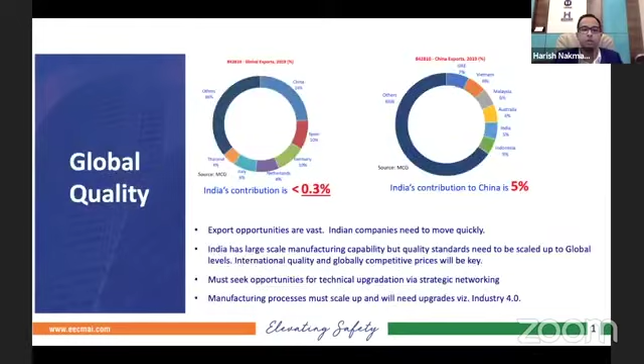The opportunities that we have: the global E&E exports are approximately 20 billion US dollars, and India's contribution is barely 0.25%. Being the second biggest market, there is a huge potential for us to get as much into the global export. And with this idea, how can this be done?

The main factor being that we support opportunities of domestic manufacturers. We make India Atmanirbhar, meaning self-reliant, self-dependent. The local manufacturers can leverage the scale from increased market size to compete with cheaper imports. With this vision, to make India the preferred hub for the global elevator and escalator industry, EECMAI was formed on 10 September 2020.

This is a Section 8 company, meaning a non-profit organization. The mission here is to support the growth of the elevator and escalator industry by promoting continuous improvement of safety and quality standards, education of the community, and networking with domestic and international organizations. There is a variety of tasks which has been put in front of EECMAI. How are we going to do this?

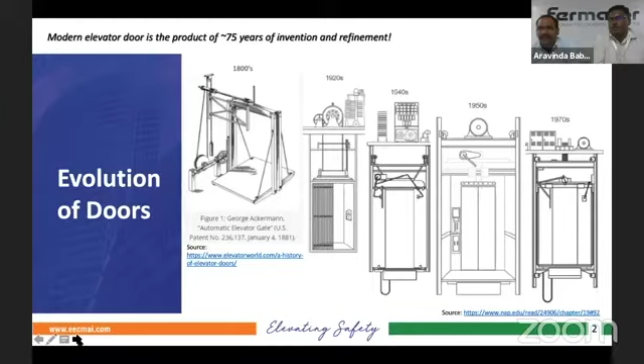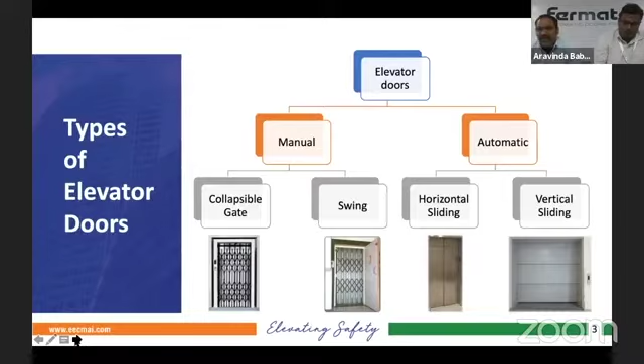Now we will look at the different types of elevator doors which we are using now. There are two variants: manual and automatic doors. In manual, there are two types - one is the collapsible gate, and one with a collapsible gate for the cabin and a swing door for the landing. Similarly in automatic doors there are two variants - horizontal biparting and vertical biparting. Now I will explain a little more about manual doors.

So let's go further - manual doors. I hope every participant has seen this type of door even now or in their younger age. These doors are basically very cheap, low cost and less technology oriented. To install them, not much knowledge is required, and there is no complicated mechanism or complicated electrical circuit provided - that is the plus point of this door. Compared to the plus point, we have a lot of negative points, which are the problems that occur in this type of door.

Let me explain something from my own experience in past years. When I was in college, we had a similar elevator that we used to board very often. As it was a college, many young people would be traveling in the elevator, and most of the time it would be overcrowded.

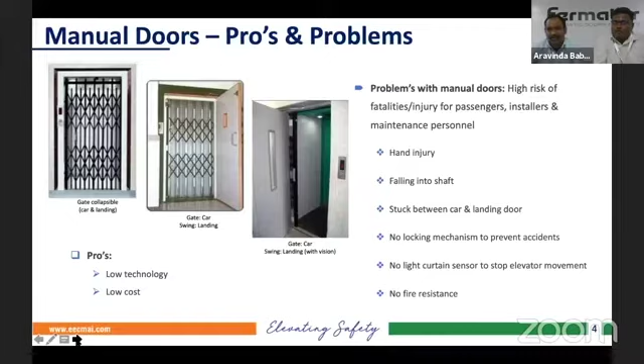As we've seen in the previous slide, similar doors were used in the 1920s. But these doors are still being used now, which is a bitter truth. Can we go to the next slide, please?

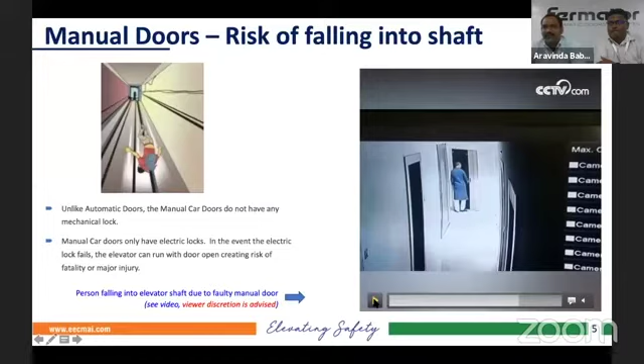This is one of the fatal accidents involving manual doors. In manual doors, it is not supposed to be opened when the cabin is not there, but in this case it was opened. The reason is the landing lock was likely manipulated, or some short circuit was done in the door. When the person tried to open it, he thought the cabin was there inside the shaft, and he was trying to step in, and now he is no more. This is a very evident video showing the risk and unsafety of these manual doors.

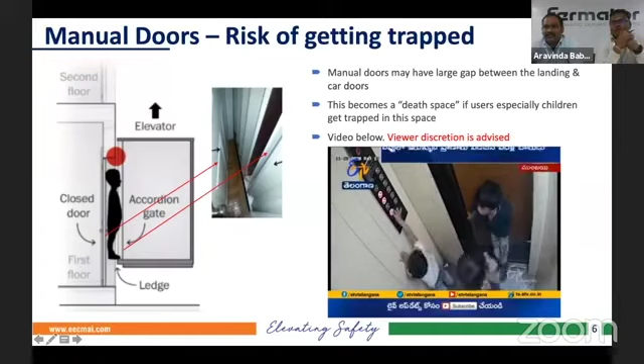This incident occurred last year in November, in Mumbai, in Dharavi. In this case, a boy and his sisters were using the elevator. Once they reached the floor level, the two sisters left the elevator. As these doors have a self-closing mechanism, it closed by itself before the boy could exit from the lift door. In these types of doors, manual swing door with manual collapsible gate, there is a huge gap between the landing and cabin, which is a very bad design of this elevator.

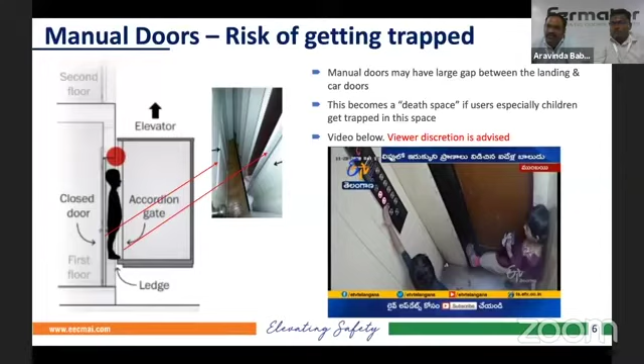In this case, you can clearly see the boy got trapped in between the car and landing. As both doors were closed, the controller registered that the doors were completely closed. Someone booked a call from another floor, and the lift started moving. Now there was no way for him to go outside to the lobby or even get into the car. The lift started moving upward, and the boy got crushed in between the floors, in between the doors. This is one of the most disturbing videos.

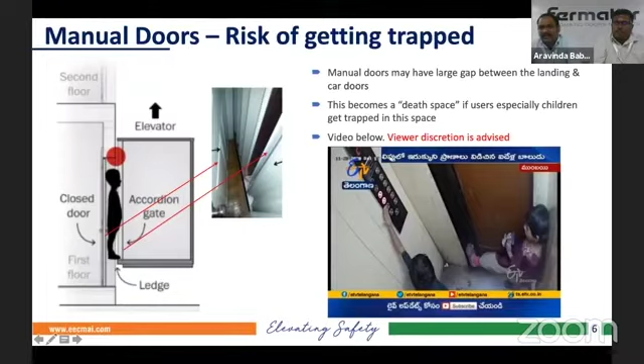Now we will see how hands and feet get injured in manual doors. Let me tell you how we use these manual doors. While entering a manual door lift, first we open the landing door, then we open the cabin door. So after entering, we want to close the landing door first and then the cabin door. Most of the time, people are not so conscious about which door they need to close.

If someone closes the cabin door first and tries to close the landing door by letting their arm reach through the gaps, once the door gets closed, the lift starts moving, and the hands will be totally severed from the body. This is how a major accident happens. As I explained before from my own experience, when more people are in the lift, the chances of handling the door safely are riskier.

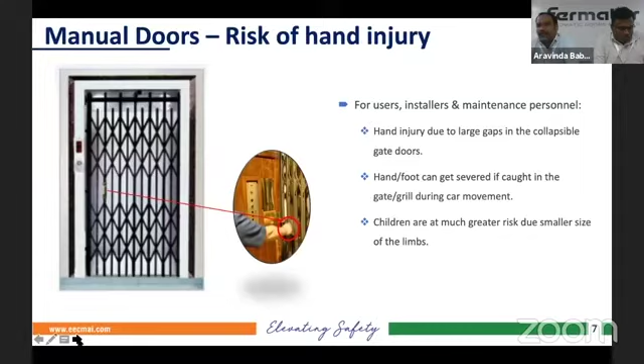So now my colleague Aravinda Babu will explain about automatic doors.

Good evening everyone, this is Aravinda here. I will explain three areas: the classification of the doors, the safety factors of the users, the safety factors of the technicians, and the standards which we apply on these doors. These are the three parts I am going to explain to you.

This is general information about the doors. The first criteria is that doors are classified based on the installation type. The first one is the residential type, mainly used for passenger movement from one floor to another, for less and medium traffic. The second category is commercial, also mainly for passengers, where there is high traffic and more floors, so we go for commercial elevators.

The next one is freight elevators. In this case, we have heavy movement of vehicles, and the application of these freight elevators is for factories and storage facilities. Those areas will be using freight elevators. And special doors are for special requirements, like aesthetic doors, such as half round doors. It's a special requirement from customers, for example in Bangalore.

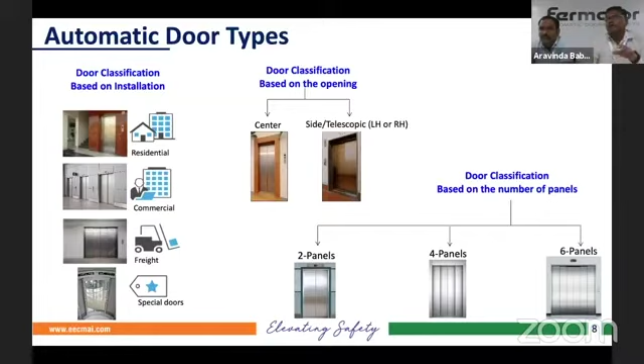In telescopic, we can go for designs of 1 panel, 2 panel, and 3 panels. As basic information, in case of 4 panels, center opening is just a combination of telescopic left and right. This is just a general concept of how the panels are classified based on the openings.

Shall we go to the next slide, sir? Yes, so there are different types.

This is the different types of panels in the market. The first image refers to the 4 panels, a standard panel made of sheet metal. The second image refers to vertical telescopic doors. The third image is for painted panels, the center opening. The last image shows the small visions. At the bottom we can see the half glass, framed glass, full glass, and panoramic glasses.

These are the panel types based on the visions, and the painted stainless steel. By this category, we can have this variance.

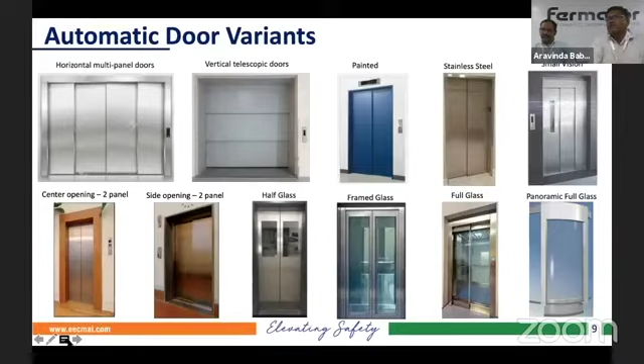Can you go to the next slide, sir? Yes, sir. Now we'll just see general safety features about the users — what general safety factors a user should consider when using these elevators. That's what we'll look at in the next slides.

As the first criteria, whenever a passenger or user is going to use these elevators, when they make a call booking, we need to be patient — either during the call booking or during the travel. That is the first important criteria we need to apply.

Second, when there are children, we should not keep them alone while using these elevators. Always somebody should be beside them. As seen in previous videos, as a safety factor, when there are kids, always a person should be required beside them.

As a third general factor, always stay away from the doors. There is a safety factor here. I can give two examples. We can have loose clothes, and as the car moves, the loose cloth can get stuck in the panels, which can lead to a fatal accident. That is the reason we always suggest staying clear from the lift doors.

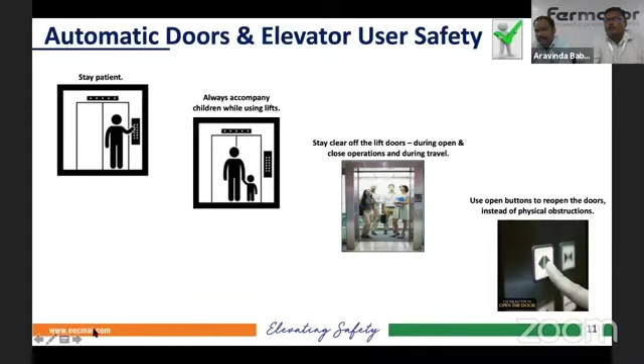So can we go to the next slide, sir? Yes, sir.

These are the don'ts which users should not do. The first image refers to people who would always try to open the door. Some people will try to open the doors when they're in the landing zones or during travel. This is also not safe, so this they should not do.

The second image refers to someone getting into the car and waiting for someone else — to call that person, they stand behind the landing door and car door, stopping the elevator while they wait. This should also be avoided.

As the third criteria, when there is a power failure during travel in the car, there's no need to get panicked. Stay calm, and press the emergency key button, or nowadays there is an ARD option which will take the car to the nearest floor and open it.

The fourth criteria: when you get into the car and nobody else is there, don't jump or play — even for kids, don't allow this. As the fifth point, somebody can come with tension, so don't show anger to the doors, like kicking the panels. This applies during travel as well — we need to consider this point and should not do this inside.

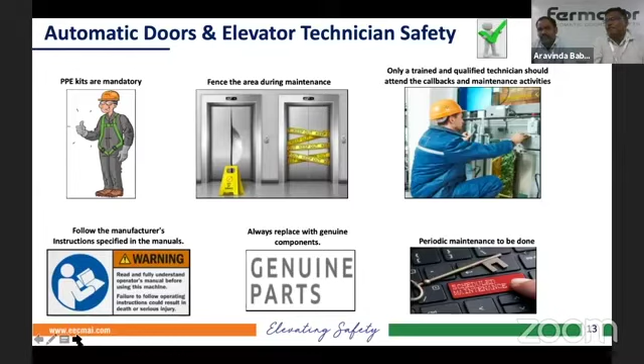Can we go to the next slide, sir? Yes. So these are the don'ts which the technician should not do. They should always not violate the safety procedures, and second, they should not violate any of the safety features.

For example, in this image, you can see one side of this landing contact is not wired, while the other side of the contact has been wired. So it is being bypassed. This kind of bypassing—this is an example like this—we need to follow all these safety factors, and there should not be any bypass done.

They should also always use the communication medium for emergencies. And when accessing the pits, they should use ladders. They should not jump inside, and they should not climb using other components—they should always use the ladders.

Our last two points are mechanical and electrical—they should pay more attention to these. While doing repair works or checkpoints, they need clear checkpoints and need to check all the specified points, as well as check that the wirings are properly connected, because this can also lead to fatal accidents.

Next slide, sir. Now let's see the standards we apply here. As a first point, there are a lot of automatic doors in the market, but not all automatic doors are tested or certified. The doors which are tested and certified within CEN, BIS, GB, ASME will be the correct doors.

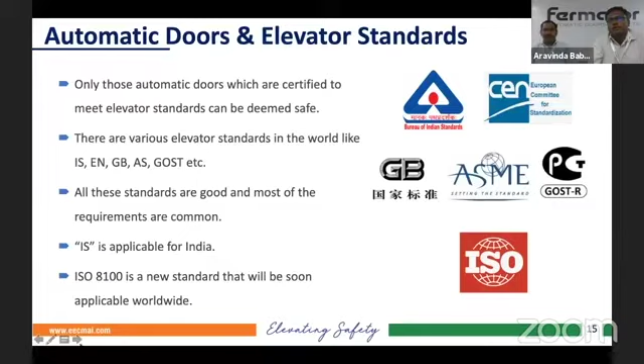This is the standard used worldwide—this is for Europe, Russia, Asia, and North America. These are the general standards used all over the world, and for us in India, we follow IS 14665. That is applicable for us.

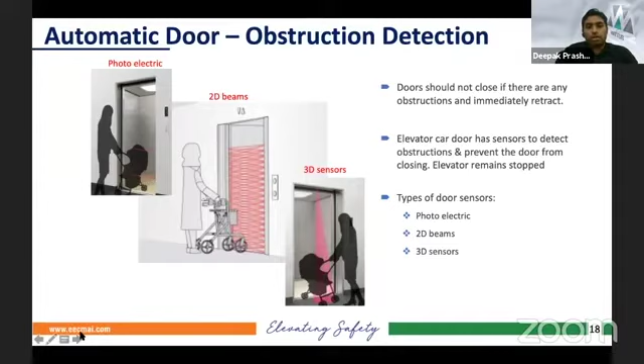The next important aspect of an automatic door is that it's also tested for impact resistance. Automatic doors are tested based on prevailing elevator standards - as my colleagues have previously explained, for different regions there are different elevator standards, and each prescribes what the impact resistance should be. It also has to be ensured that even after impact, the door should not come out of the elevator sill, and it has to act as a barrier to avoid the person falling into the elevator shaft. I have a small video which took place in past years.

You can play the video.

Mr. You can pause the video.

So here you can see, though this incident could have been avoided, this is the reason why even if a user tries to vandalize or show his frustration due to unknown reasons, all elevator automatic doors, landing doors and car doors both have been tested for impact resistance.

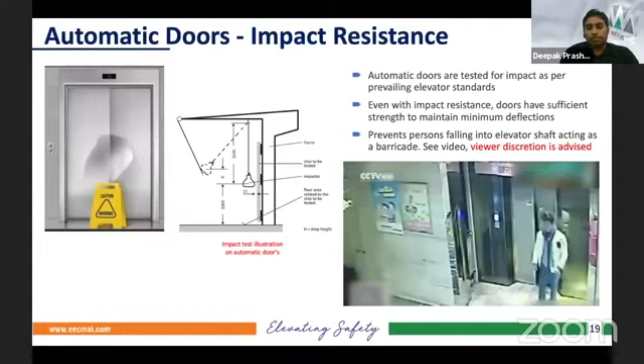The next one is the moving elements, the door panels, which are guided at the bottommost section by a subcomponent called the sill. The last one is related to the toe guard. This is the basic layout of the automatic elevator landing door. Each subcomponent is tested for mechanical tests, electrical tests, durability tests, and also fire tests. So whenever a door system is designed, this checklist has to be ensured, tested, certified, and only then is it released to the market.

The detailed testing of the subcomponents I'll explain in the next slide. Apart from the automatic elevator doors, it is also considered a silent operation, and this is ensured by performing a noise test in an anechoic chamber.

The basic difference between manual and automatic doors is that in manual doors you have to touch the doors to open them, whereas in automatic doors it is all controlled by the system so the user doesn't have to touch it. That is why it is considered touchless entry.

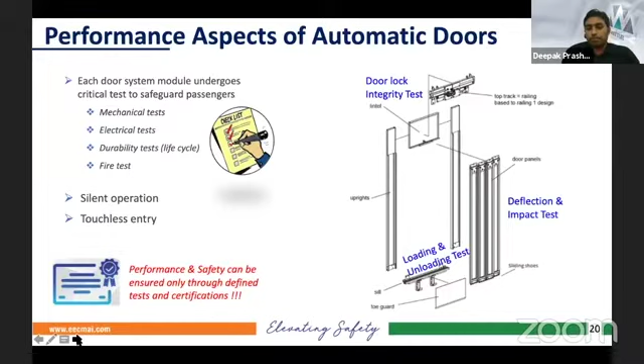Next slide, please. This is related to the landing door mechanism, and here we are checking the lock integrity. The landing door lock prevents the door from being opened manually, and this door lock is a very critical component, as it assures safety in automatic doors.

This is ensured in automatic doors by getting a CE certification. A CE certification is from a third party or certified external laboratory which ensures or witnesses the test performed by the manufacturer after providing the design details and test reports.

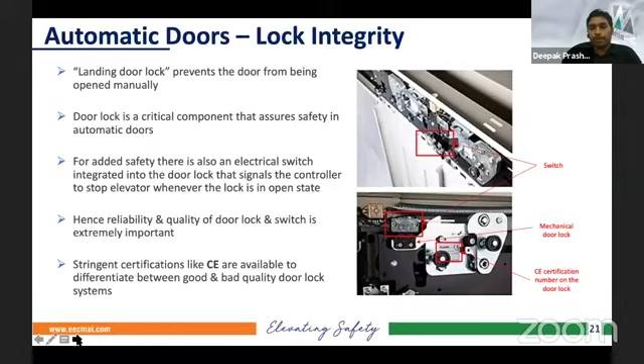Next slide, please. This explains the second criteria of a door panel system: deflection resistance. The first criteria here is ensuring the gap between two door panels.

Consider a condition during maintenance where untrained technicians, or for an unforeseen reason an end user, get trapped inside an elevator shaft, and when trying to exit they try to pull the doors manually to get untrapped. This is actually a risk to both the technicians and the users, since there is a landing door lock provided in the automatic elevator door system.

By pulling with hands, the gap between the door panels can widen, and people can get stuck in this gap. Even when people get stuck in this gap, the door panels are still intact at the top, because the landing door lock prevents the doors from opening, and this makes the elevator system consider that the doors are closed and the car can operate.

But for this reason, there is a special kind of test according to EN, IS, or even American standards for different criteria, where a predefined load is applied at the bottommost panel and the midsection of the panels. This simulates that environment, and it has to fulfill the deflection criteria.

This is again a deflection criteria resistance, but to different subcomponents. Right now we'll focus on the elevator door sill, shown in the first image with the blue arrow marking. This is called an elevator sill, which has a primary function to withstand the deflection caused by people and material movement for the period of 20 to 25 years for which the door system is designed.

A weak sill, if it deforms, can form a trip hazard. When people enter or exit the elevator, they can fall in either direction, causing serious injury to end users. Hence, elevator door sills must be thoroughly tested to ensure the deflection is within the prescribed standards.

In this testing, there are different guidelines or criteria to be followed. One is a static load test, and another is a dynamic load test. In the static load test, the worst case load is applied on the sill for a predetermined timeline, and after that, the deflection of the sill is measured.

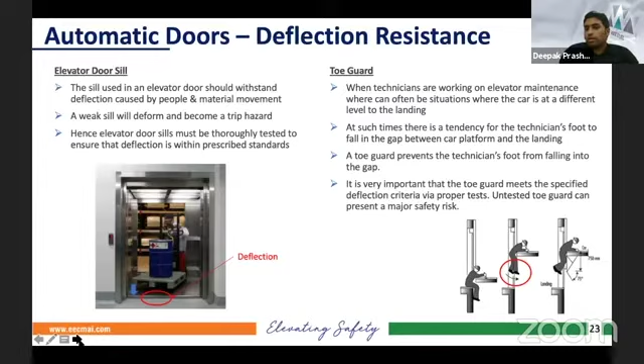Good afternoon, everyone. Let's see together what happens when a fire occurs in the building and how the elevator is involved. Let's start with what characterizes the door and the fire resistance, and why it is useful to have a fire resistant door in buildings which are sensitive to the event of fire.

So what happens when a fire enters and occurs in a building? Usually the fire tries to go around the building and spreads horizontally, and even tries to go upwards and downwards. The shaft of the elevator is one of the fastest ways for the fire to climb the building and move from one floor to another. So the fire usually tries to enter the shaft of the elevator if there is the possibility.

For this reason, in certain buildings it's required to have fire resistant doors in order to avoid the spreading. In particular, usually when the building is higher, the protection required has to be even higher.

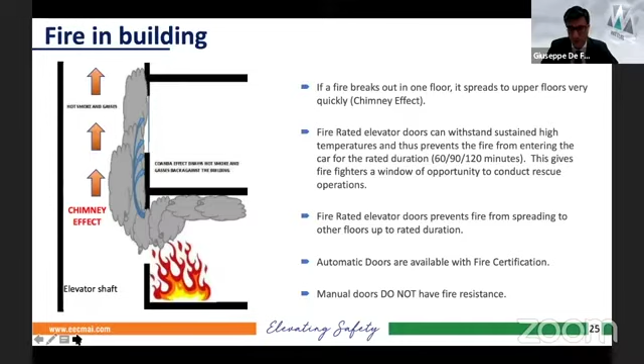So let's skip to the next slide. Which are the regulations existing in the world that are important to certify and qualify the fire rating resistance of the door? Today there is the EN 81-58, which is used mainly in Europe, but even in other countries around the world. Then there is BS 476, which was the norm coming before EN 81-58, still used in some countries, typically even in India or other Malaysian countries, but is disappearing step by step. Then there is UL10B, which is typically used in North America and some countries around the world.

The classification of the fire resistant door can vary depending on the fire resistance that we want. Typically, E is indicating integrity, so the door is able to stop the fire from passing through the door and entering the shaft. EI is insulation, so we stop the fire not only from passing through, but we insulate the internal of the shaft from the temperature rising. And then the last one is EW, which is protection not only from the fire passing through, but even from the radiation of the fire. Duration, as we said before, is typically 60, 90, and 120 minutes.

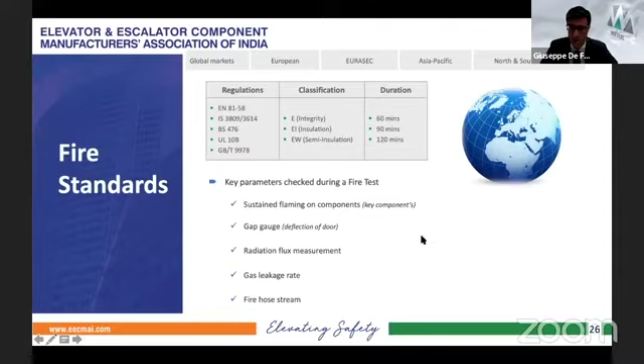Which are the parameters that a door has to fulfill to be able to pass a test, to be able to fight against the fire? First of all, the first parameter is sustaining flaming on components. The second is gap gauge measurement, radiation flux, gas leakage, and fire hose stream. Now we will go deep into these key parameters.

So the first one: a fire impacting a door will transfer a big temperature to the door itself. The component has to resist this temperature and has to be able to not let the fire go through. So if the fire is able to go through the door or to ignite one of the components, if there is a continuous flaming for more than 10 seconds, then the door cannot be fire certified. This is important because if the fire is able to pass into the shaft for a certain time, there is a high probability that it will spread within all the components that are inside the shaft. Typically, the fire is like a monster that tries to spread around the building.

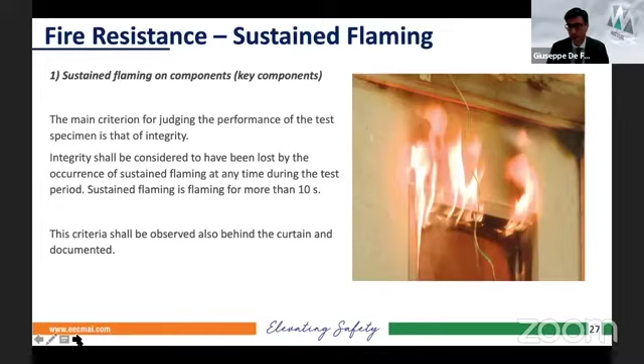What happens to the door during the fire event? The door, due to the fire, will start deforming. This deformation is normal in every metal, in every kind of material affected by the fire. So the steel, the stainless steel, and all the different materials used to build the elevator, if they get very hot, they will try to deform. It is important that this deformation does not allow the fire to pass through. So it is important that during the fire, there will not be spots or gaps between the door elements that let the fire enter the shaft. For this reason, during the fire test, this is monitored, and it is a failure if a rod of 6 millimeters or 25 millimeters is able to pass through the door. Because if one of these elements is able to pass through the door, it means that the fire will pass through.

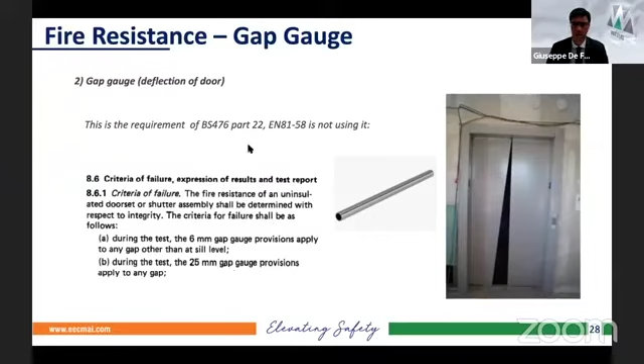Another protection that may be required of the door is against radiation. Maybe the fire is not able to pass through the door, but we don't want the people in the shaft or in the car to be affected by the temperature, the radiation of the heat of the fire. For this reason, there is a test using sensors, where we detect how much radiation is passing through the door during all the time. The radiation must not exceed 15 kilowatts per square meter, because this is the limit of tolerability by the human being.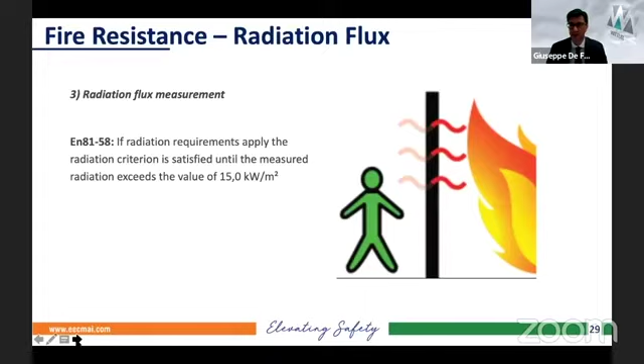This is important news starting from the 90s: buildings were becoming taller. You can take as reference the Imperial Towers in Mumbai. More than the fire itself, the issue can be the gas or smoke generated by the fire. Imagine in a big tower that on an intermediate floor there is a vent of fire—all the people in the higher levels of the building will be blocked by the fire. Maybe the fire doesn't reach them, but the smoke and gas will go up and create a disease, or even make people unable to breathe and die.

This is why the latest test methodology includes gas leakage rate detection. It is not allowed for a quantity of gas exceeding 3 cubic meters per minute to pass through the door. The first 14 minutes of the test are not taken into account, because during that period the water inside the door creates a kind of smoke, but this smoke does not last long—it will last only until the water disappears.

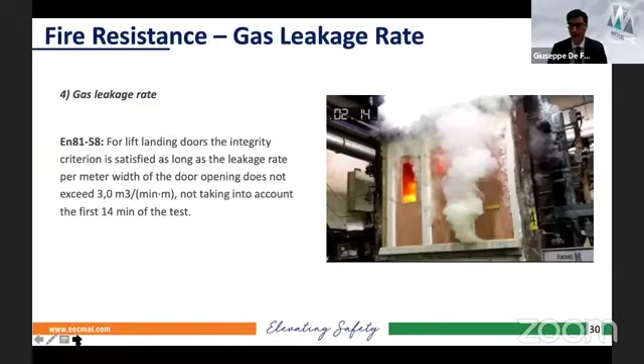So this is very important for the evolution of the elevator and of fire protection, because buildings are becoming taller and taller. Next slide, please.

This is a test that is typically done with UL10B, applied in America in particular, as I said before.

So what happens in the building? Usually a fire starts, there is a lot of panic, the fire spreads along different floors, and then the firemen arrive. The firemen enter the building when there is a lot of smoke, and they start the water pump to try to stop the spreading of the fire and extinguish it.

There is a problem that maybe there are people inside the shaft or in the elevator car. These people need to be protected from the firemen breaking through. So if the firemen try to extinguish the fire with the water pump, it must not be able to break the door and reach or hurt the people in the elevator car or shaft. This is very important—it is not applied to all types of fire rating, but it gives additional safety to people inside the elevator.

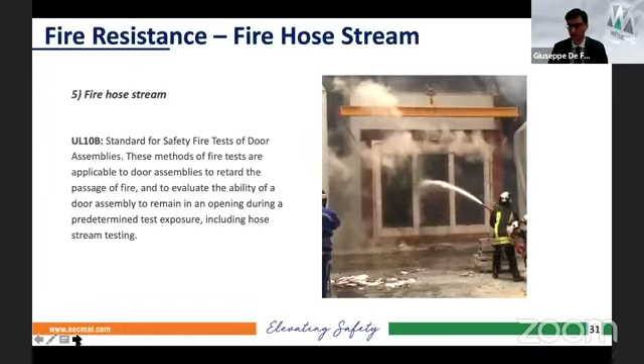The Indian elevator standard usually makes fire rating mandatory when the building is more than 15 meters in height, basically more than 3-4 floors. Usually manual doors are not fire rated, so in case of fire rating an automatic door is suggested. There are accredited fire laboratories around the world, very famous, that can certify and qualify the door to be fire resistant. The fire resistance must be certified—there is no fire resistance recognized in the market if it has not been certified by a notified laboratory. The classifications, as said before, are E, EW, EI: E is only integrity, EW is integrity and radiation, EI means integrity and insulation, and an EI door is by default also radiation protected. So if you want insulation, you immediately get radiation protection as well. The duration is typically 60, 90, and 120 minutes, as said before.

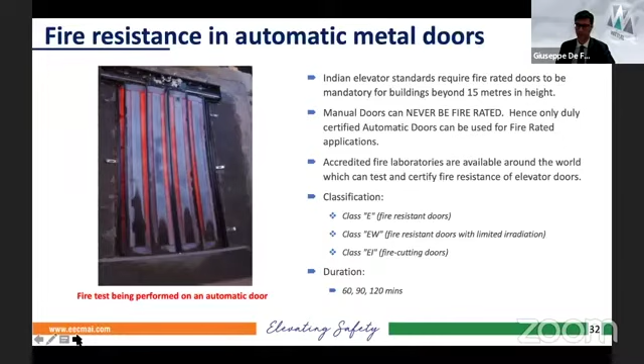Glass: usually, as reported in the Indian standard, the vision panel should not be provided on power-operated doors. So usually they're not provided, and doors with glass are predominantly not fire rated. There are, in any case, doors with fire-rated glass that can assure a certain resistance to fire. This is an option, a variant available in the market. Obviously, even in this case, the fire rating has to be tested and qualified by a certification body. Fire-rated glass is not common glass, so it's much more expensive than normal glass, but it assures very high protection.

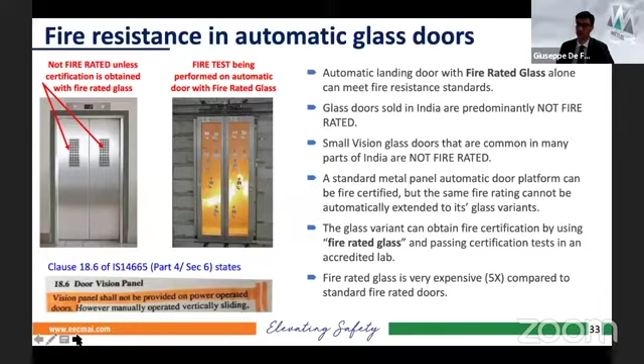Here is a summary on the future standard. So today, one of the main and most famous standards available in the global market is the EN 81-20/50.

In the future, there will be ISO 8100, which will be globally applied. So there will be a harmonization of all the safety requirements for elevators globally. The elevator is not different worldwide. All the elevators should assure the same safety level and the same protection. So we expect in the future to have one common standard that can be applied everywhere.

This will have some exceptions because the interface to the building and the fire protection may vary depending on the country and on the building code. But we'll assure that there is an easier certification of the product among countries because the solution will be recognized worldwide, and it will be possible to have global free trade. So it will be possible from India to export very easily because the solution will be recognized worldwide. The goal is to have one product and one norm worldwide.